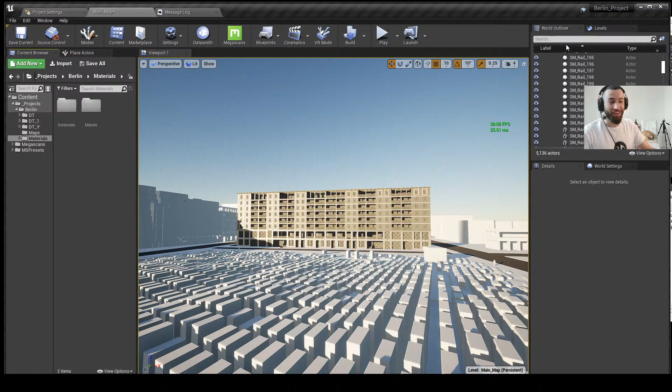More tea. Are you guys staying hydrated? Awesome, let's get started. I'm trying to look at the chat, I'm very excited, really. It's a pleasure to have all of you.

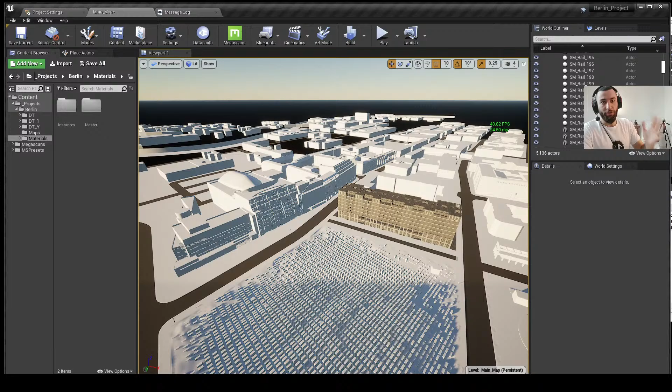To give you some background about this project, this is a project we did last year in Berlin. We stopped it because of the pandemic, and now I think it's a great time to revisit some old projects and make them look good, teach you guys, learn from my old mistakes, and just get better in Unreal Engine. The main goal of this project: this was supposed to be a massive building, like 140 apartments, 12 commercial stores, in the city of Berlin. If you are familiar with the Memorial to the Murdered Jews of Europe, which we mentioned in the video, I counted these one by one. So we will learn how to visualize and make things look good in Unreal Engine.

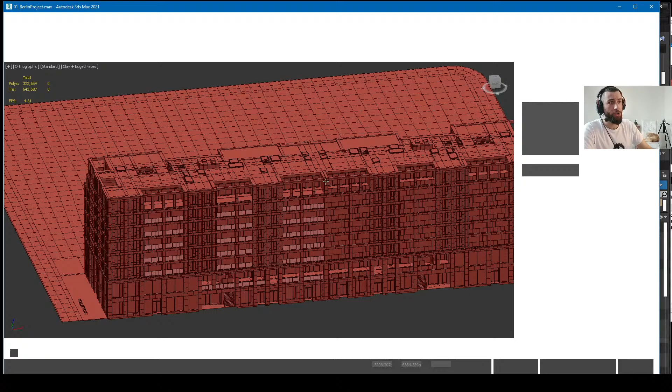Right now I'm using dynamic lights in my scene. There's really nothing complicated going on, I only have the sun and sky that we can get from the lights here. I have some textures assigned on the facade and the streets, and the rest are 3D models, meshes we did in 3ds Max. So this is the building, and the city is in another Max file. We may revisit some of these files here.

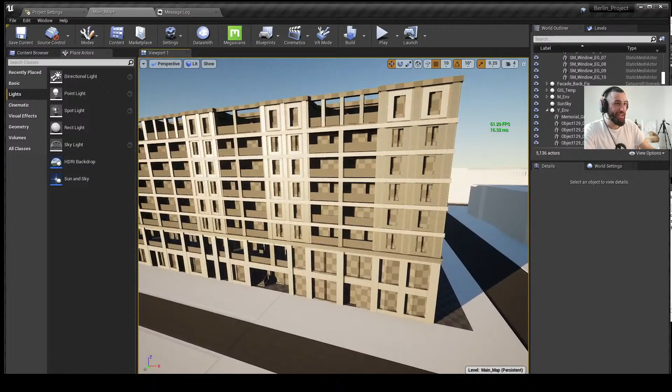Okay, first things first, I wanted to show you how we can sometimes steal some stuff. For example, I'm redoing this project and I would like to get a glass material. I already have another project opened that I'm going to steal stuff from.

So let's open any map with a glass texture, or let's just search for glass. So this is a glass texture material here.

Let's open it. There are multiple ways you can migrate assets from an Unreal Engine project to another Unreal Engine project. One way is to simply right click on any mesh asset or any asset, go to asset actions, click migrate.

Or if it's a really simple node like this, you can select all of these nodes, press Ctrl C, and if you open any text document and press Ctrl V, you'll see this weird C++ code. It copies to your clipboard, so let's close this.

Ctrl C here. Let's go back to our main Unreal Engine project and go to where we have our materials, to a folder called master, which contains all of our master materials. Right click, material, and let's call this M master glass, or glass master.

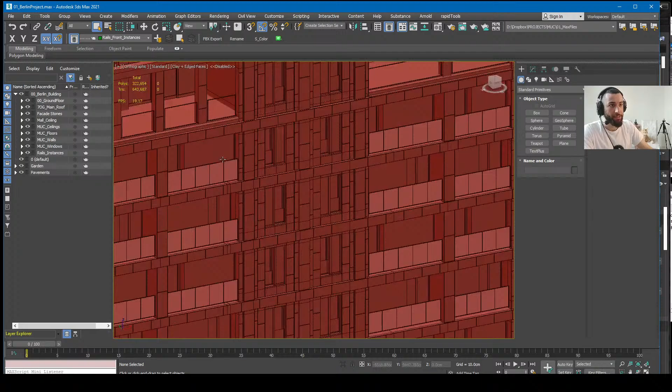For example, if you have a glass mesh, or like a mesh with multiple material IDs, you should stay consistent.

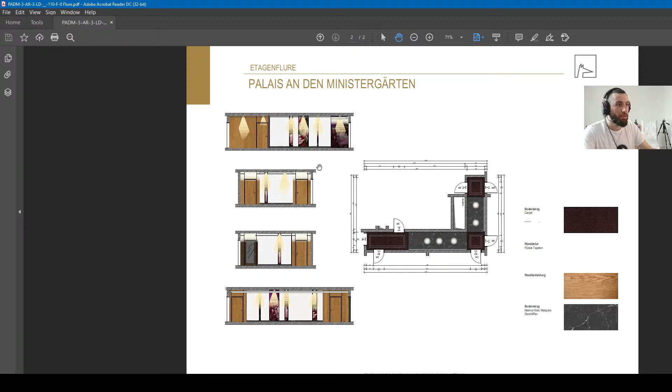Yes, so when you start a new project like an architectural project, you should have a reference to start from. If you don't have a reference, the least thing you can do is just make a box mesh with 1 meter by 1 meter by 1 meter and then start on that. And in the industry there are standards, like 99% of the walls have a thickness of 20 centimeters, height of 3 meters and whatnot.

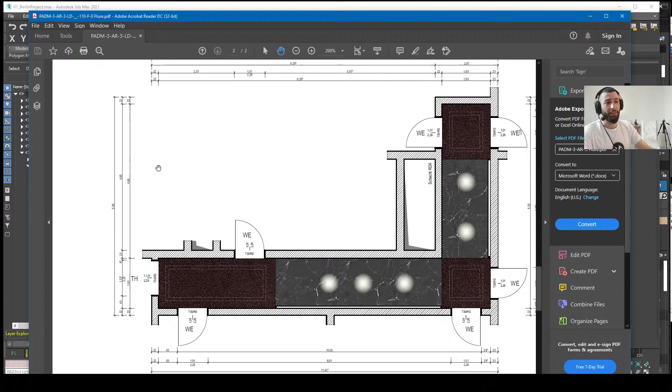Practice makes perfect, and the longer you spend reading plans and understanding your project, the less mistakes you're going to have. For example, in this project it's accurate to the millimeter, because we made all of it from real architectural plans. There were like 50 or 40 plans for all the different elements. It would be much easier if you can model your project inside Revit or AutoCAD, then send them to Max to clean the mesh up, then to Unreal. And these days it's getting easier to clean the mesh in Unreal. I hope this answers your question, my man.

Another question: curtains.

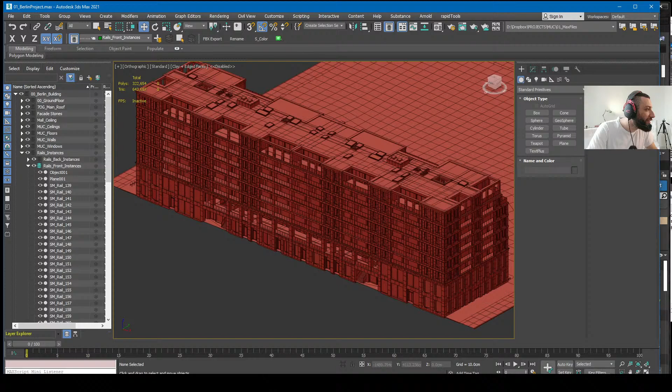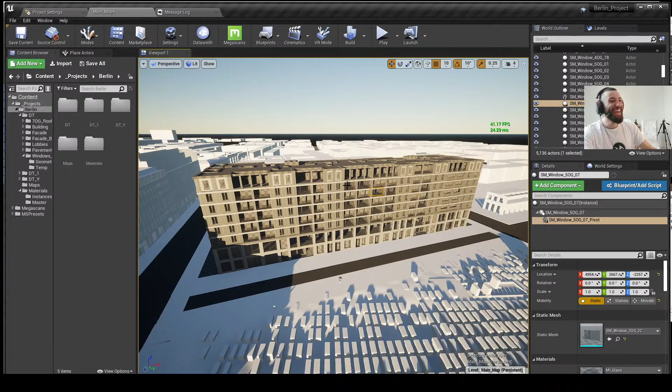Continuing. Yeah, you guys understand what I mean. Where are we at? Let's just select some more meshes and assign the glass texture.

I'm glad this was informative, Hangover. I like your name, Hangover.

Let's select this mesh, click assign. Nope, search for our material. Let's click save. I think at this point our project looks good, not bad.

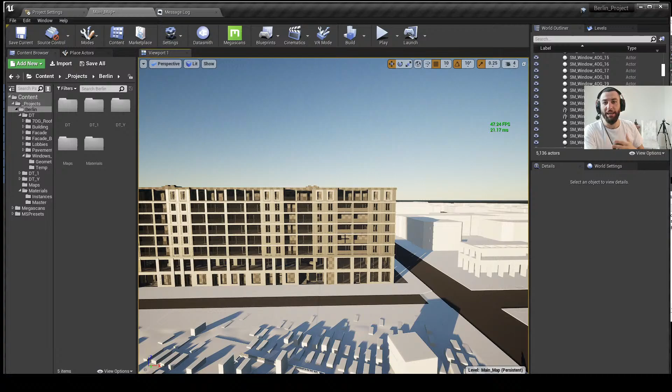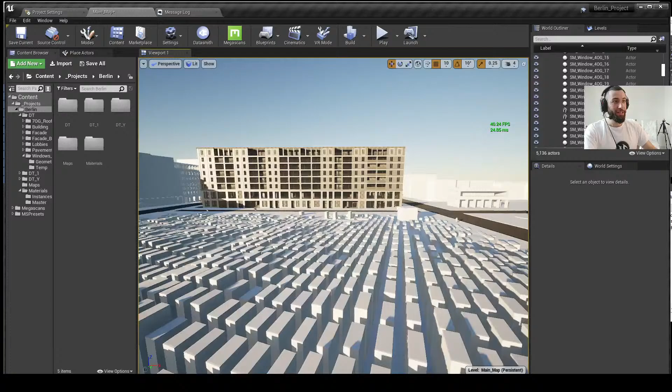What I like to do when I start new projects in Unreal Engine, guys, is take work-in-progress screenshots. Let me show you what I mean. You can do this in two ways. You can create a bookmark, using your keyboard with numbers from 1 to 0. So here's a shot we like — go to this arrow that's moving down, go to bookmarks, set a bookmark, and you have 10 bookmarks to choose from. Zero, for example, this shot, and perhaps this shot.

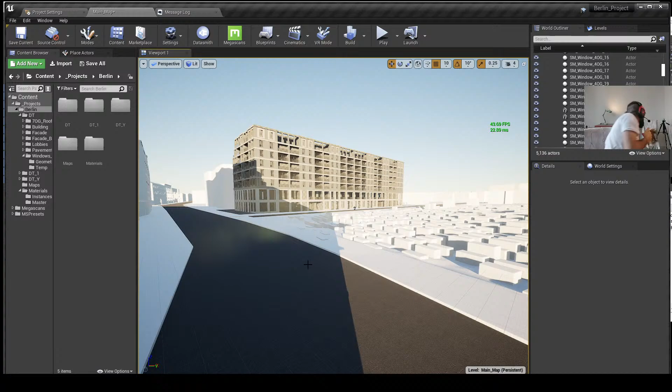Harun, come here boy, say hi. Oh, you actually came. Harun, wanna say hi? Good boy. Stay there, boy.

This is another shot we like. I'm gonna, yeah, actually made it. And here's another shot, let's say — go again here, click bookmarks, set bookmark, bookmark number 2. Now you can see from the active bookmarks we have 0, 1, and 2. If you click 0 on your keyboard you go to the first bookmark, 1 to the second, and 2 to the third.

And then you can just press F9 — you cannot see it, but here the engine tells you it took a screenshot. So another F9, and it will save it to the saved folder in your project, screenshots. Let's do this, and it will give it a name. I like this way, but it's not my favorite. Let me show you my favorite way.

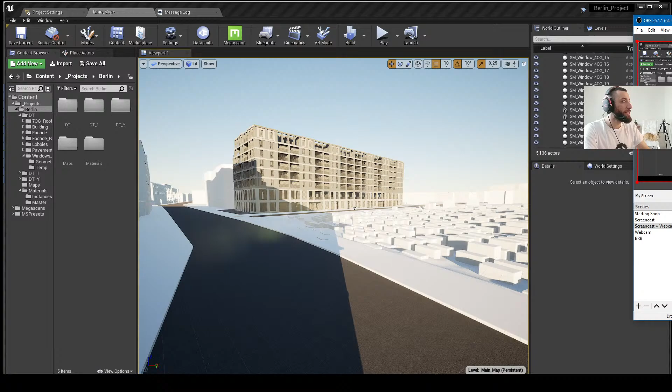Just let's reset things. My favorite way is to create 2 or 3 cameras, no more than that, because taking work-in-progress screenshots of multiple cameras is painful. We click on this arrow again, create camera here, cinematic camera actor. Click on perspective and let's switch to this camera. Give this camera a name — WIP, work in progress.

So when you search for it here, you can easily find it. Let's say this camera — click on high resolution screenshot, set it to 1 or 2. 1 is the scale of your screen, 2 is like a multiplier by 2. And this is a new option I think we have from Unreal 4.25 and above — use date and timestamp as image name. It's 10 times better than using the image name like screenshot 0, 1, 2, 3. In some scenarios, like me, you'll have perhaps 500 screenshots for some reason.

So having the timestamps and date as image name is awesome. Click take screenshot, and if you go back to our folder, you can see high resolution screenshot 2021, with the time and the date. This is way much better than taking high resolution or work-in-progress screenshots without date and time stamps. Thank you Epic for doing this for us. I don't want to show you the nightmare folders I have with like 400 screenshots.

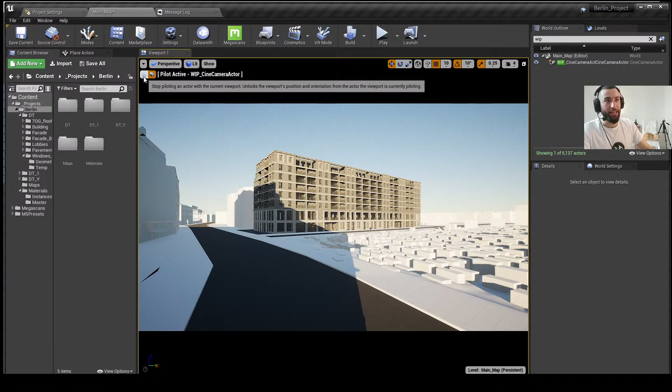So having two cameras like this, let's make quickly another camera, for example from the top, because later we're going to import all of Berlin. Let's say this is a nice place to take a screenshot of our project. Go to this arrow again and create a cinematic camera. We can switch to it and let's set the focal length.

Let's also give it a name like work in progress underscore then the name of the camera, and let's give it a focal length of 18. Then let's create another high resolution screenshot.

Can you guys see Haroon? He's being a cat, boy. He's been sleeping all day and decided to wake up just now.

Let's delete this. Now we have two work in progress screenshots with the date and time as stamps. Let me read the chat real quick.

This boy Aragon, my man. Adding water in Unreal Engine, that's only in Unreal 4.26, I believe - I can't remember, I didn't cover this yet, but expect a video on this soon. I have a list of 50 tutorials coming to the channel. We're doing our very best to make more and more videos. My dream, guys, is to make the best architectural tutorials in Unreal Engine that are interactive and look good. This is why we focus on lighting too much these days.

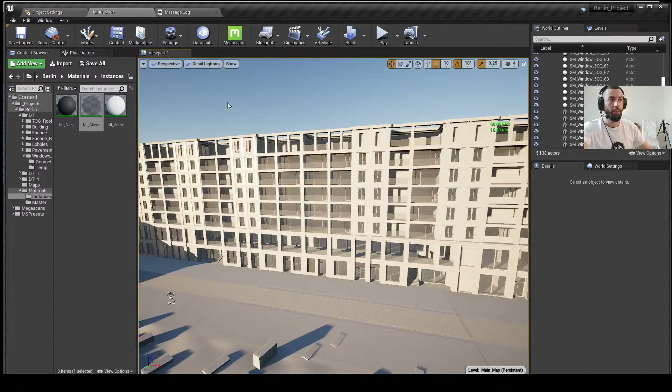Yeah, let's call it a day, enough glass, let's see what else we can do. You can switch between view modes. In our case now it's kind of hard to see the project, or in any case when you want to build light or your performance is super bad, you can, by pressing Alt and then the numbers on your keyboard, switch between view modes. Unlit is a great view mode to see what has textures and what not.

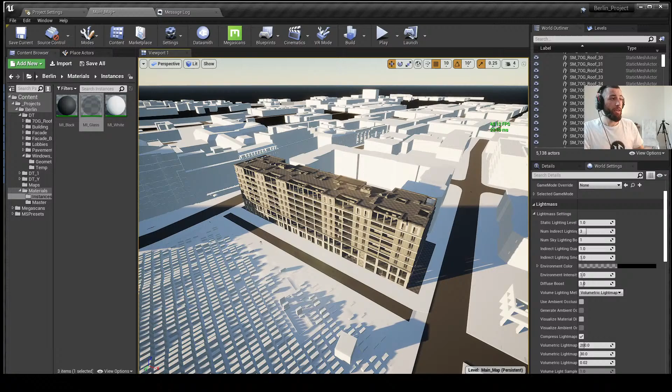In the enterprise industry, sometimes you see crazy powerful setups because our customers, the owners of this project, have a computer designed to run massive projects. This is one of the nice things about the enterprise industry - you'd expect your customer to have a powerful computer. Five years ago when I first started, one of the services I offered was, hey, I can design you this project and build you a computer. It's a good business model because this project costs millions, and you're doing this visualization to help sell it. A supercomputer costs nothing compared to what they can make from it, so you wouldn't expect them to run this on a cheap laptop or bad computer. It's not always the same - sometimes a customer has a cheap laptop, but in that case, pixel streaming is one of the solutions.

Next idea. Yeah, performance - I'm trying, I wanted to say a bad word, but I'm not gonna say that. The music is perfect, thank you, Harris Hiller.

Yes, Marios. I have a question: how do you do the lighting in interior spaces without directional lights? I've noticed there's a big difference with the GI from light sources versus only lights, point lights, etc.

When it comes to interior projects, let's say you have an enclosed space where there is no sun, you would just place your lights as you normally do. You have spotlights, you place spotlights. You have area lights, you place area lights. Let's see if there's a good example - like in malls, I don't know, can I think of a good example? When it comes to lighting, you need to place your lights in your project as you'd expect them to be in real life, giving the correct intensity, the correct temperature, the correct fall off - this stuff is crucial to get accurate, physically accurate lighting.

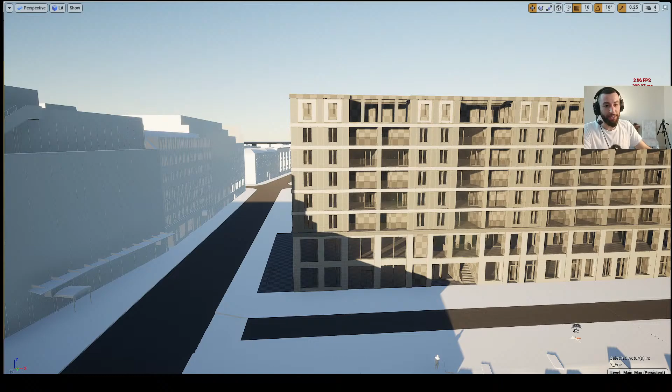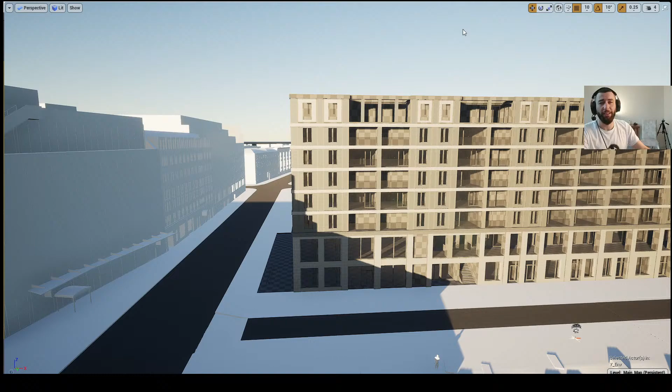When I use pixel streaming, there's only one end user. I wish I could help you more, Octave. One person you can contact, I'm not sure if he's still doing tutorials on pixel streaming, is Nazaro, but I think he can help you. Or you can use, if you want the easy way to do it, Furioos, they're not expensive to start with, and you can do some experimentation. Doing pixel streaming manually, I wish I knew how to do it, but it takes a different type of experience. It's on the R&D list.

Oh shit, I almost spilled my tea.

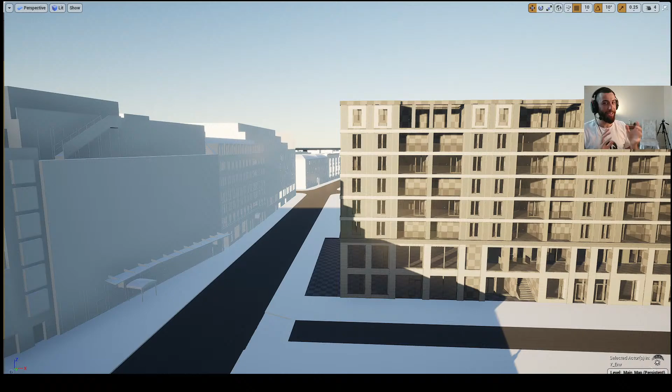Do you think pixel streaming can work with VR? Two months ago I was attending one of Epic's presentations on the technology. At some point in the future, once we get to 5G or 6G, I think we're going to have very light VR headsets connected to the internet. Perhaps Elon Musk is trying to do that for us. But I believe at some point in the future, yes, that's totally possible. It might sound sci-fi-ish now, but once we have faster internet connections, we might have that. The problem is, for VR headsets, you need a minimum of 90 frames per second to have a good experience, and with pixel streaming now, it's limited to around 30 frames per second. With bad internet connections, you're going to get dizzy. So not now, but perhaps in the future, we might have pixel streaming like Ready Player One kind of stuff for VR. I hope so.

Not dystopian stuff though.

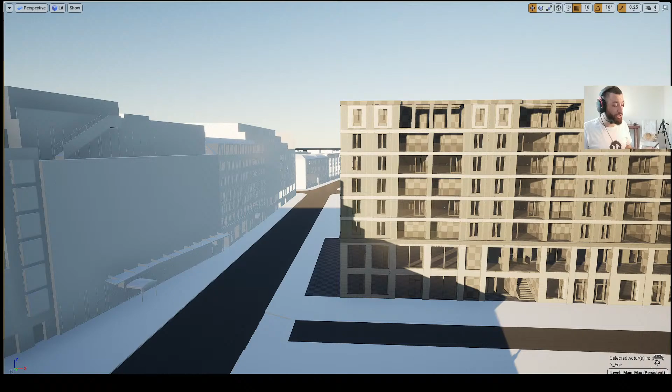No, not at the moment, Justin, but here's my notebook and here's my pen. Clouds - I was experimenting with clouds on a basic level in Unreal Engine 4.26. It's really amazing how, out of the box, if you go to Place Actors and just click and drag, you have clouds. Right now I'm using 4.25 because I'm using GPU Lightmass - it's much more stable on large scale projects like this. But a clouds tutorial is coming soon, I promise. So many tutorials coming soon.

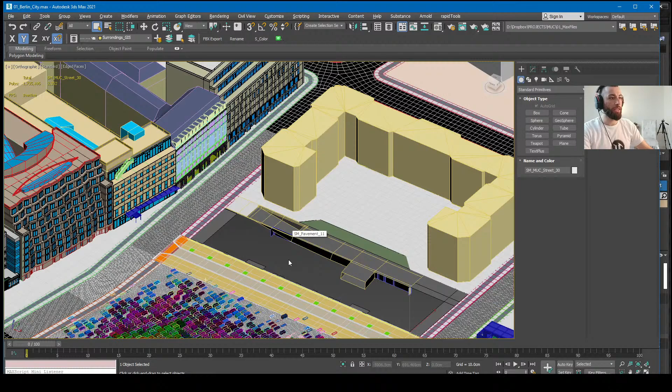The next thing I'd like to do: 90% of the assets we get from Bridge, if you look here, it says 2 by 2. This means the texture is 2 meters by 2 meters. In our project workflow, we give every single mesh a UVW mapping of 1 by 1 meters. Let me show you what I mean—let's select this guy.

Looking at my grid, at the world grid, I know from here to here is 1 square meter, 1 meter by 1 meter. So to have this texture assigned correctly on our surface, for example the ceilings, you need to double click it, go to global in the parameter groups, go to tiling offset, and set the tiling on X and Y to half the value, which is 0.5 by 0.5. It looks stretched here, but now this is the accurate scale of our texture on the surface in our project.

Can you repeat one more time, please? How did you select ceilings like that?

I will show you quick tricks I do in Unreal to make my life easy. Assuming our project is organized and we exported it in multiple Datasmith exports, like if you remember from our previous tutorials here.

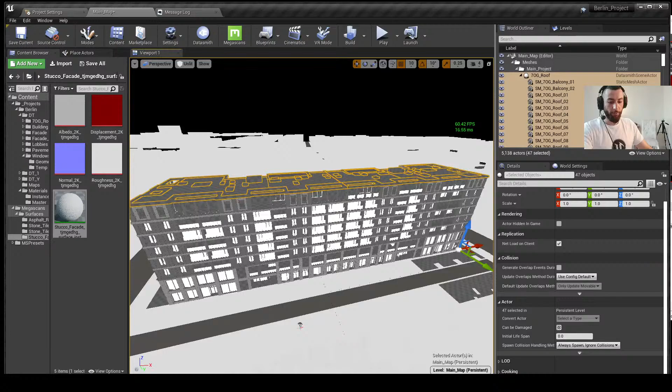Now I have a custom shortcut set, like H. To set custom shortcuts I have another tutorial I'm gonna post for you later. Basically you can set your own shortcuts.

So anything you see here like World Settings, plugins that does not have a shortcut, if we go to edit, editor preferences, then to keyboard shortcuts, and just search for what you want to search here.

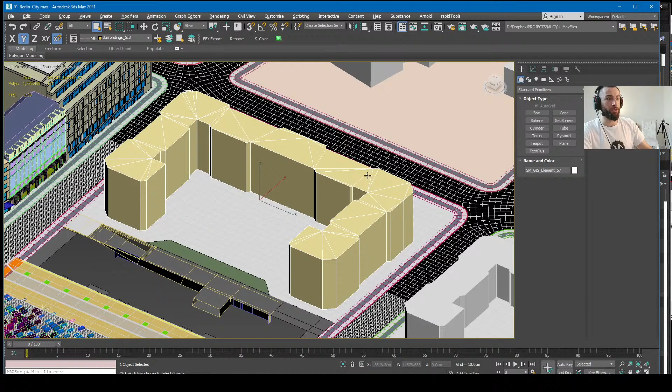In our case, like isolating meshes. In 3ds Max we're used to selecting this building, pressing Alt Q, and isolating it. It would be so much easier to work on this building by seeing only this building, rather than having a whole city around us. So the same for Unreal Engine, but it does not have a shortcut.

However, if we right click any asset, there is something called visibility, show only selected. So once we go to our editor preferences, select keyboard shortcuts, and in the search type details show only selected, you can set a shortcut. The same for anything here, like Ctrl Shift D and whatnot.

Quick question, like plugins - can we have a shortcut for the plugins? Well, it seems that we cannot assign a shortcut for everything. Perhaps not these guys, or we could, but we need to search for it.

So something else like group, Ctrl G, group, regroup, and like this good stuff. Editor preferences, keyboard shortcuts - this is one of the best hidden things we don't usually look at inside Unreal Engine. It would just make your workflow so much easier, setting your own shortcuts and changing the defaults. Always change the defaults, guys.

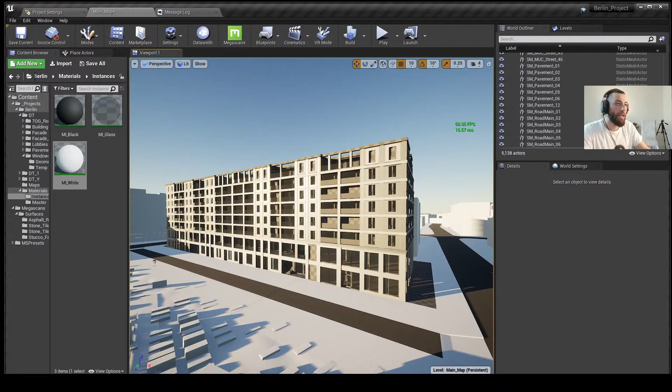I think we should stop soon. Don't want to say any bad words. Yes, let's wrap up then.

In the upcoming tutorials I'm going to show you how to do vertex painting, displacement, more lighting stuff when it comes to lighting such big projects, and we might even need to optimize this guy a little.

Actually, one last thing. Now you can see this annoying lens flare. To get rid of this, we need to add a post-process volume. To do that, just go to place actors, visual effects, and search for the post-process volume here. Click and drag. There you go.

Before you do anything with this post-process volume, first we need to tell it to make this everywhere. For now it only works if we are inside it. I'm gonna show you an example. I'm gonna set the lens flare here to 0, but nothing happened because we need to go inside the post-process. Now the lens flare is gone, right?

This is a great way to have multiple post-process volumes in your project when you have exterior and interior. Later once we finish, we're going inside and then take the elevator up. So you simply need 2 different post-process volumes, one for inside and one for outside, unless you're fine with the auto exposure.